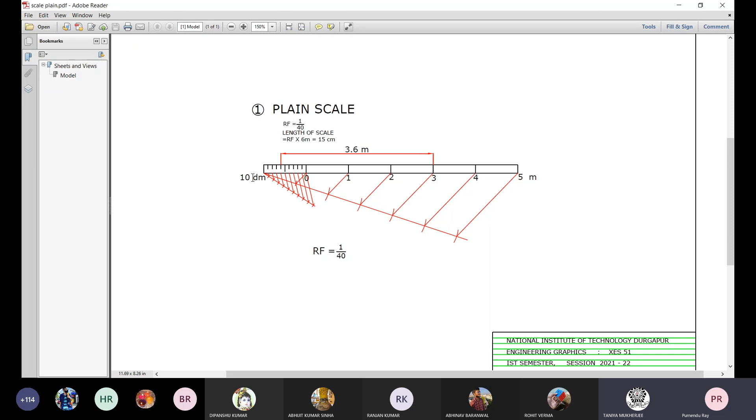Next step, this 15 centimeter length which represents 6 meters is subdivided in 6 equal parts, so each small division represents 1 meter according to our RF, the representative fraction. Next, 1 meter is to be subdivided into 10 equal parts. So this is the geometrical way.

Along any inclination, take any suitable radius, go on marking with these arcs of that fixed radius for 10 divisions. Now connect this point with that point and draw a series of lines parallel to this connected line: 1, 2, 3, 4, 5, 6, 7, 8, 9. So this line is subdivided into 10 equal parts geometrically.

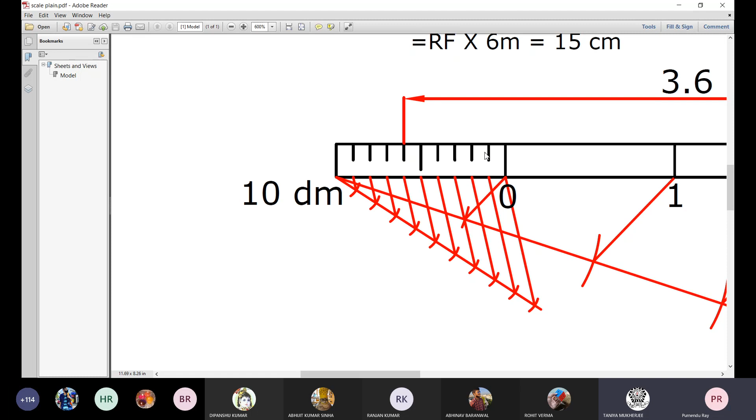Now place two set squares, one along this line, the other perpendicular to that. When you match it, connect this point with that set square and draw a line here. But for this 15 centimeter line as length, we draw a rectangle, so this perpendicular line and this parallel line at a gap of around 5 millimeters.

So we draw this rectangle, then mark these subdivision points with 0 major subdivision, 1, 2, 3, 4, 5. Write the unit as meter. Now for this part, as if it is looking like a real scale...

We draw a bigger line starting from the upper side of the rectangle and, using two set squares, one edge of one set square matching with this line, the other set square made perpendicular to that set square edge, draw these small lines. Is there any doubt about this?

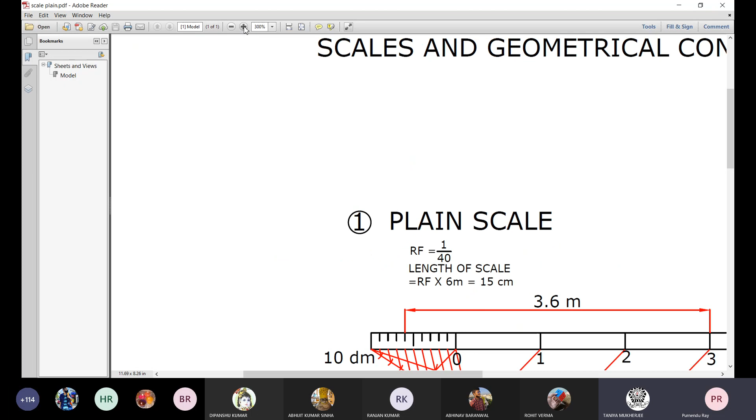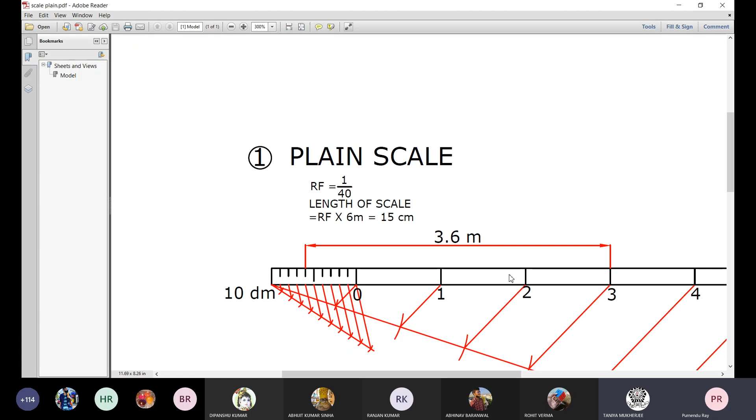Now once you complete this part, the scale is ready to measure any length, of course within 6 meters.

Now according to the question, you have to show a distance of 3.6 meters. So from the 3rd division, draw one extension line, from the 6th division of 1 meter, that is 1, 2, 3, 4, 5, 6 decimeter, that is 0.6 meter. Draw one extension line, draw this dimension line, put the dimension arrowheads, put the dimension figure and the dimension unit 3.6 meter according to the scale with this RF, and put the value of RF equal to 1 divided by 40.

Write it below this drawn scale. Now one more thing, these lines with this red ink, it will not be - of course it may be available, but you should not do it. It is only to differentiate between this process of geometrical division and the scale. I have taken it, but in your drawing you have to show all this construction with very thin lines, with lighter impression. But they should be there to give your examiner the information that you have subdivided this line geometrically in 6 equal parts, you have subdivided this one division in 10 equal parts, etc.

I hope I am not muted. Yes sir, no sir, okay. You are audible sir, audible sir.

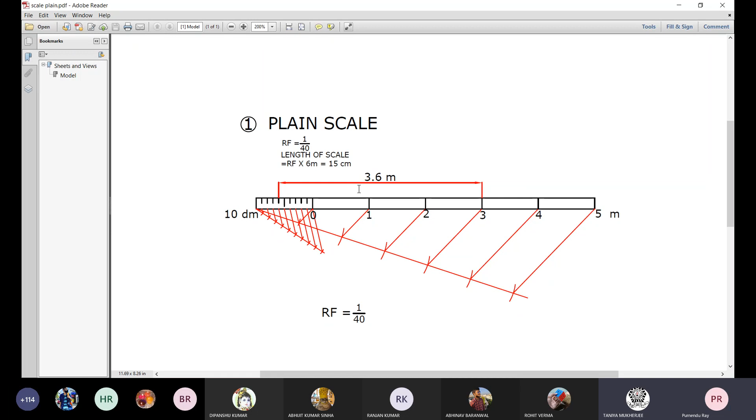And finally, you have to show this distance 3.6 meters there. That corresponds to the one solution on plain scale, and you need to accommodate only this problem on one A4 sheet in landscape mode, because it is not like your NIT drawing hall practice with big size drawing sheets to accommodate many solutions. It is not there. So at your home, whatever is available, you work accordingly. I hope before our next class you will be completing this.

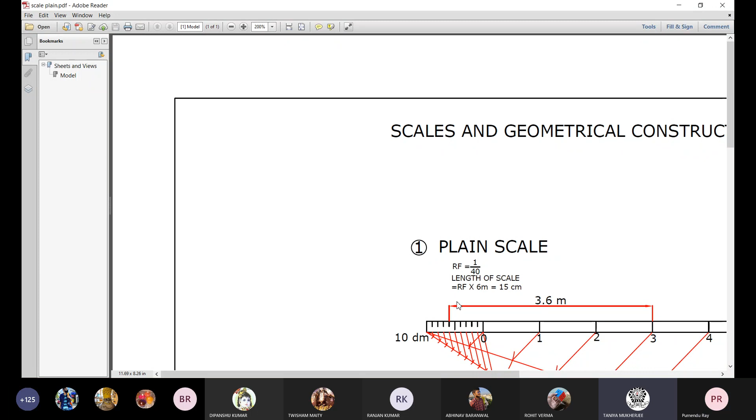But let us provide 5 millimeter gap there for this rectangle. And on the upper line for this rectangle, we draw these smaller demarcation lines. But this halfway, that 5 decimeter line, should be little longer, but not touching this bottom line, so that it looks like this representative scale. Now that is for plain scale.

Now we discuss about - sir, I have made one, can I show? You have made one? I have made one yesterday - before class you said how to make it, so I tried to make it. Can I show you if it's right or wrong? Just can you give me a little time so I finish this demonstration first? Okay sir, no problem, no problem.

Okay sir, now this plain scale - almost complete information is there. Next thing, let us talk about that vernier, the diagonal scale, whatever we have discussed that day. Now I will share that file.

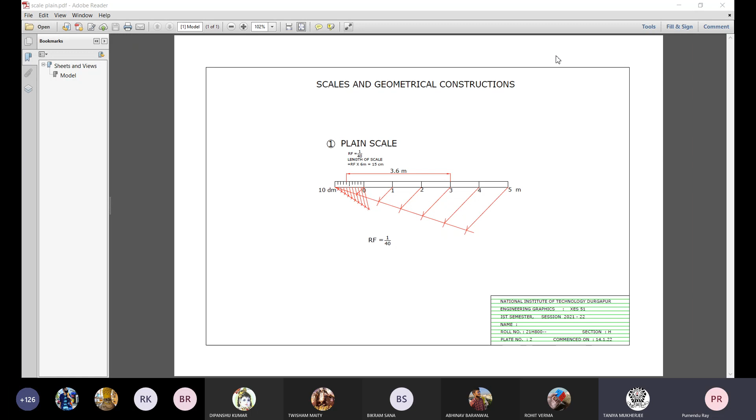Is it available there? Yes, sir. So take a separate A4 page, draw the borderline at the right hand bottom corner. You draw that title block with ink. You write your roll number, corresponding section, date of commencement, etc.

Sir, one question. In the big size paper, you said the title block size will be 180 by 65 millimeter. But you said we have to do it in A4 size paper. So what will be the size in that smaller paper?

In the smaller paper, the font size is 5 millimeter, which is prominent. But according to the paper size, if you want to reduce it according to that scale, the mathematical calculation comes to 2 millimeter. So if you write something with 2 millimeter height, it will not be readable.

So that's why you can take some space. I think the height is 65 millimeter, not 80. So if you use 65 millimeter plus 10 millimeter plus 10 millimeter, that is 85, 65 plus 20, 85 millimeter out of 210. Then whatever space is left, you can accommodate this drawing there.

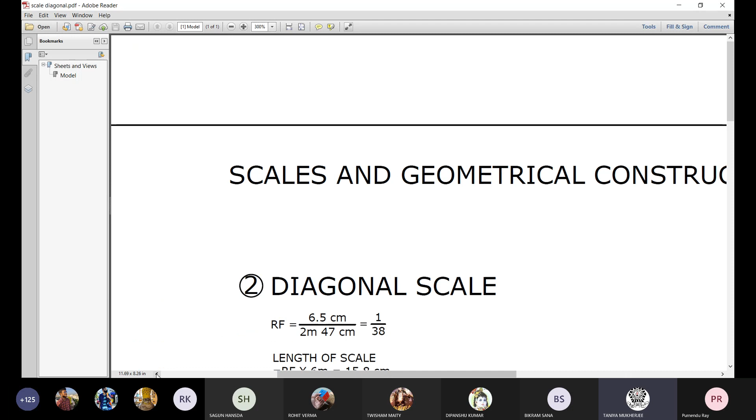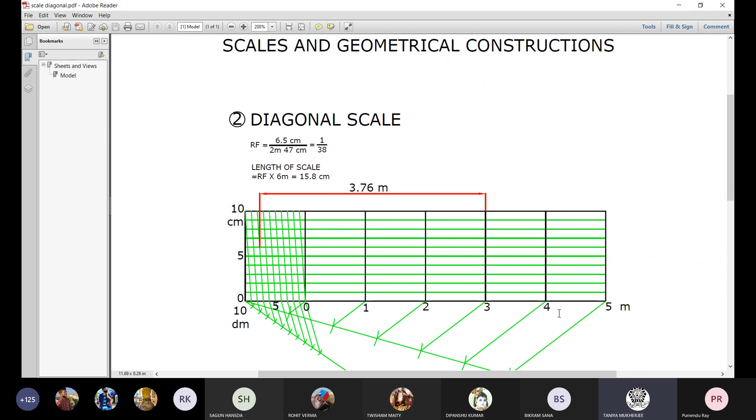Is it okay now? Yes, sir. Now, first step was to calculate the length required, the real 1:1 length. RF you have to calculate, it is not supplied.

This is the drawing distance, 6.5 centimeter. This is the object distance, 2 meter 47 centimeter. So the ratio is normally written in the form 1 divided by some number, that is the reducing scale, RF. Now the length of scale is RF multiplied by the length to be shown there. So 6 meter multiplied by RF is 15.8 centimeter.

This is not a very handy value of 15 centimeter to subdivide in 6 divisions. It's not like that, it is 15.8 centimeter. So take a length of 15 centimeter 8 millimeter along this horizontal line.

Then subdivide the upper green line into 6 equal parts, you know how to do that. Then you get 1 meter, subdivide it into 10 equal parts. Next step, draw this black rectangle of 40 millimeter height. That is in our hand.

So the height of the rectangle may be from 1 inch to 1.5 inches, something like 25 millimeter to 40 millimeter. But let us take for our convenience 40 millimeter, so that we can set a distance of 4 millimeter in our spring loaded divider. Now take a length of 4 millimeter, fix it and go on marking 4 millimeter, 4 millimeter, 4 millimeter in that way. And repeat that on this side also.

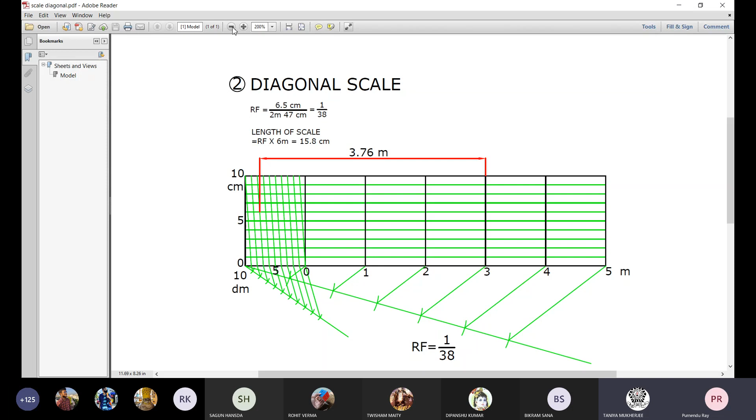Sir, it is right, it is right. The second one, yes sir. So follow this instruction, this information. This is the calculation, this is the corresponding length required, 15.8, and these are the steps. I hope this has been demonstrated and elaborated quite extensively. There should not be any problem with anybody.

Okay, but you have to take several pages, one solution in one page, and you please use your leisure hour.

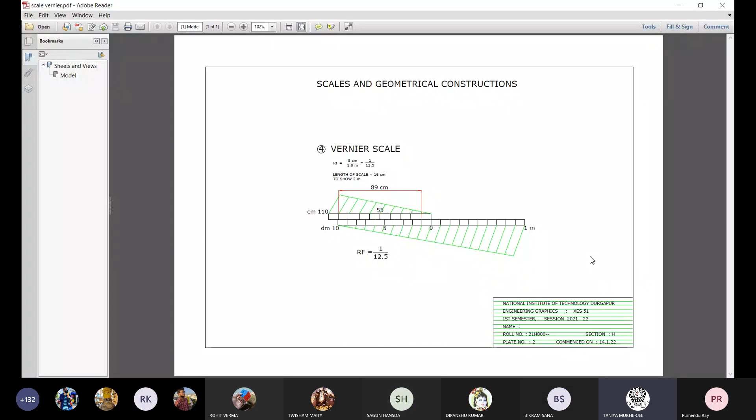Third one is skipped. Pardon? You skip the third one. Is it not the problem number 4, the vernier scale? Yes sir, but you skip one - third one is skipped, that I am telling.

Look, in a book there might be 950 problems, and in your school your teachers took only 15-20 sample demonstrations. Okay, so no problem.

I was thinking you will take all the sums. No - some sample demonstration will be there, then you have to put your own investment. That your investment capital will be your time, your intelligence, your passion for learning the subject from other materials. Compare different solutions, go through many books, hard copy, soft copy, but you have to give your time, and there is no such shortcut in learning.

The learning procedure is fixed, whether it is at your home learning from your mother's nursery rhymes, or whether at school, university, colleges, whatever it may be. Primary investment should come from your side, otherwise this business in no way can you make profitable. Okay.

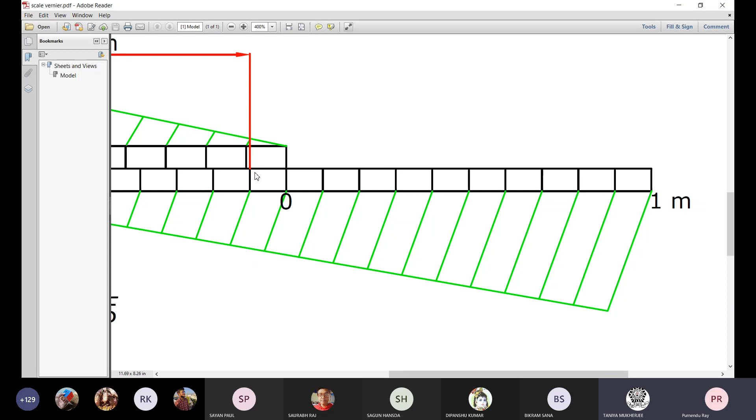Now, once you have that 1 centimeter reading, you cannot get that 1 centimeter subdivision for each such thing. For the second subdivision, the gap is 22 centimeter minus 20 centimeter, that is 2 centimeter. Here the gap is 3 centimeter, but ultimately this is 33 centimeter on the upper line, 30 centimeter in the lower line. So you have to match the calculation corresponding to the length to be measured.

Now centimeters are in the multiple of 11 only. So if you find this required length to be shown is 89 centimeter, you first check the place of this unit. This is 9. So take a distance of 9 such divisions on this centimeter scale. It will be 99 from 0.

And from that you need to subtract 10 centimeter which is available in the main scale. So put a line here as an extension line which gives 99 centimeter from this 0, and put a line 10 centimeter from this 0 on the main scale. Then what about the distance between these two extension lines? It is 99 up to 0 minus 10 up to 0, that is 99 minus 10, that is 89.

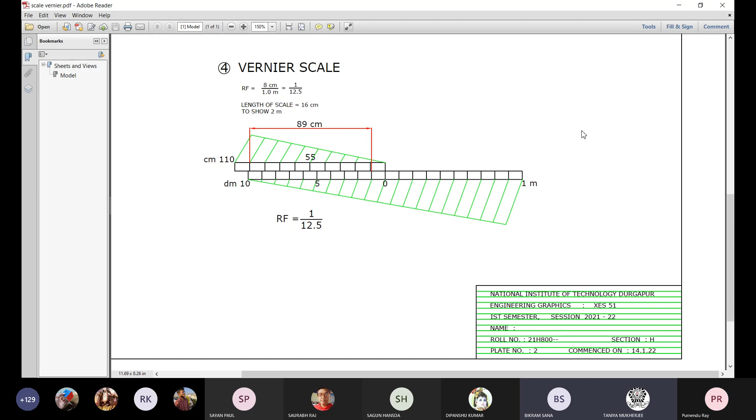Sir, how will marks be given for engineering drawing? Engineering drawing, total 100 marks is there.

There is no CA1, mid-sem, end-sem formal examination, but your performance will be evaluated. First type of thing is the on-the-spot test. After this discussion, I will give you some different data, maybe some 9 centimeter length representing a certain length,

and you calculate the RF, then find the length of scale and draw a vernier scale. The data will not match with this sample. I will give you half an hour time during this 2 to 2:45, half an hour time. You start, take half an hour, finish it.

Then I start the meeting again. At random, I will ask you to put your camera on and focus it on your solution page, and immediately I can get that impression about your performance.

That is the running class performance, which we normally do during the real classroom in your engineering graphics sessional class in the drawing halls at NIT Durgapur. There, so many people are there, maybe 3-4 teachers, along with 2-3 PhD students, research scholars, and 3-4 master's degree students doing MTech at NIT.

So there will be so many people. First of all, they are your service providers. At the same time, they are your examiners also. So they will roam around the classroom and go to every table and note down your performance within that stipulated time.

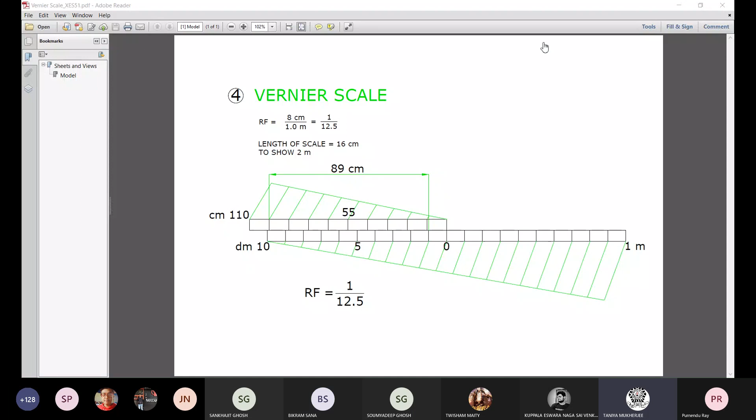So from that diagonal scale, just 1 minute. This is for meter, decimeter, centimeter. Suppose the length is there in yard, suppose 5 yards or 6 yards. So subdivide in 6 equal parts, and one part will give you 1 yard. Now you subdivide this 1 yard in 3 equal parts. Then the small division is 1 foot. Then diagonally, instead of 10 such boxes, you make 12 such boxes.

So you are subdividing this 1 foot in 12 equal parts diagonally. Then the small division you are getting diagonally is 1 inch. So you can take up that type of problem. Whatever book you are following, take that type of problem for your own practice. And for assignment, there will be a combination, maybe.

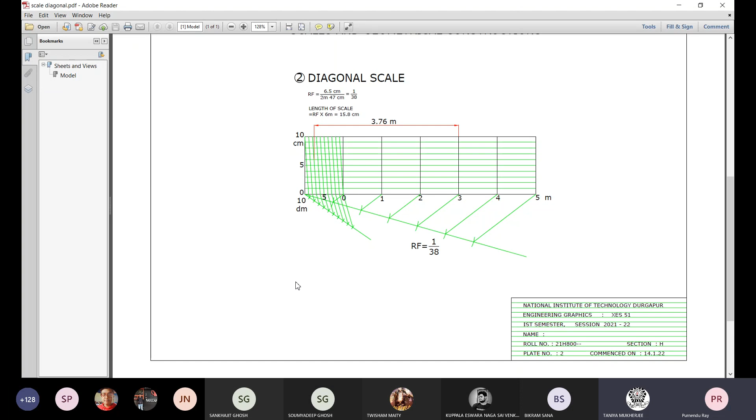Now, after this scale portion, there are several problems on geometrical constructions. These geometrical constructions start from problem number 6, and regarding this problem number 6, I discussed earlier.

Now, is that file shared? The problem sheet? Not available on your screen. No, sir, in the screen it's not shared, you have shared in mail. Got it. Anyway, now it's shared.

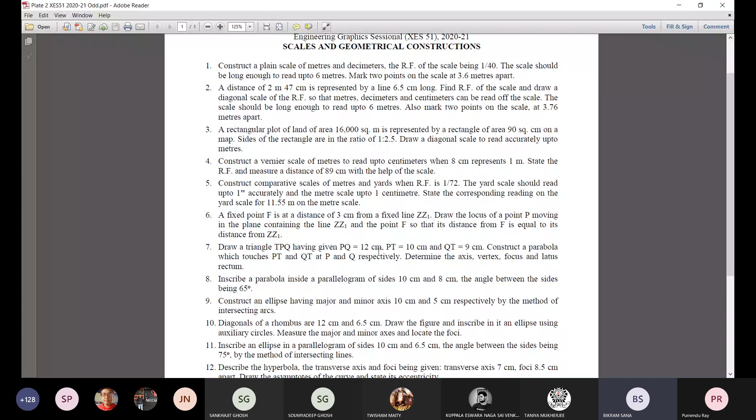Now, this problem 6 was discussed. Problem 7: Draw a triangle TPQ having PQ equal to 12 centimeter, PT 10 centimeter, and QT 9 centimeter. Construct a parabola which touches PT and QT at P and Q respectively. Then determine the axis, vertex, focus, and latus rectum. Now I will go for that approximate method of drawing a parabola by this triangle method or something like that.

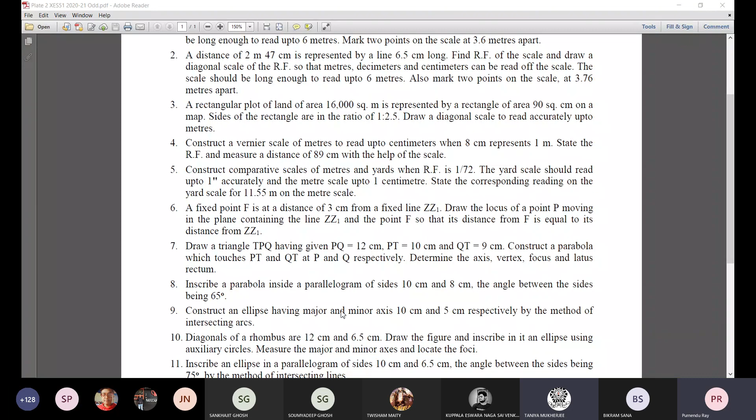It may be directrix and focus - these two informations are given. That is the conventional problem, the first problem on parabola. Now, just hold a minute.

Now, is it there? Yes, sir. First step, you draw this triangle with the given information. Now, all dimensions in millimeter - it is written somewhere on the top of the title block, so we do not mention the units separately here, 120 millimeter, 100 millimeter, etc.

So draw this line PQ horizontal of length 120 millimeter. And how to draw this triangle with PT 100 and QT 90 millimeters, that you know very well from your schools - simply draw two circular arcs of radius 100 and radius 90, taking point P and Q as centers. So this point of intersection, you do it.

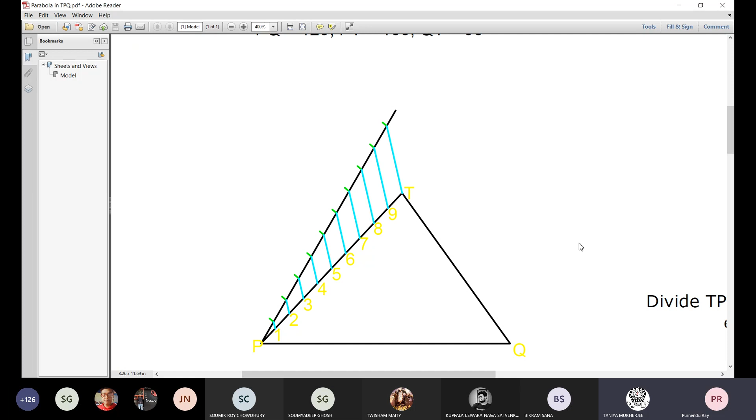Divide TQ geometrically in 10 equal parts. The same thing - take any line along any inclination, take any suitable radial distance, go on marking them in that way. If it is P, it is T, and now it is Q.

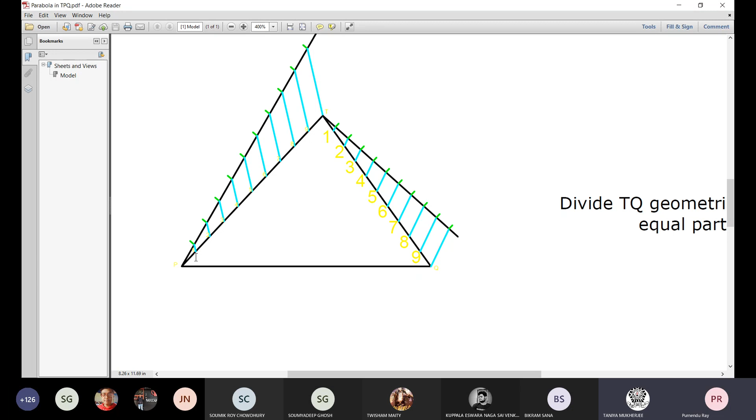So now one thing - you start marking with these identification numbers 1, 2, 3, etc., not from bottom, but from top. In the earlier case, it was from here 1, 2, 3, 4, 5, 6, etc. Now it is coming down 1, 2, 3, 4, 5, 6, etc. Next step.

Draw the lines connecting one with one on this line PT to other on the line TQ. This process we have done with this colored line. What about the name of this color?

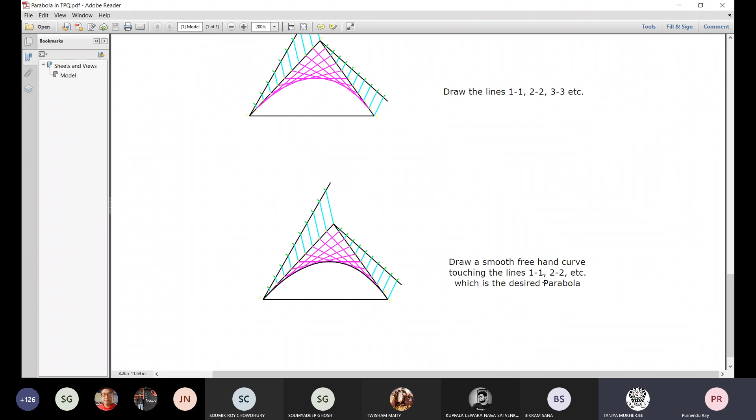Now next step is to draw a smooth freehand curve touching the lines 1-1, 2-2, etc., which is the desired parabola.

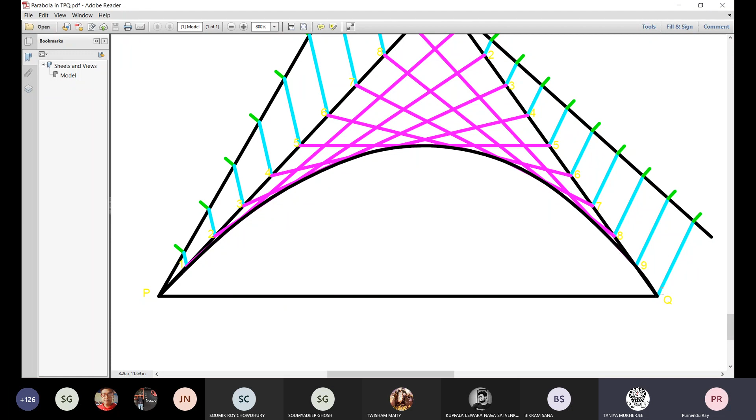So take the pencil and with very lighter impression, you just go on touching the straight lines in this way very smoothly, and you should not make it at one go. With very thin, very lighter impression, you try to make this line, then erase it, make it a little more close to a curve, a continuous smooth curve. In that way, after 1 or 2 trials, you can draw this line. Now make it prominent.

Now there is another part of this question. What about that? Latus rectum. Determine axis, vertex, focus, and latus rectum. You take 5 minutes time to think.

I'll join. I'll take the attendance and I'll join. No, sir, we know.

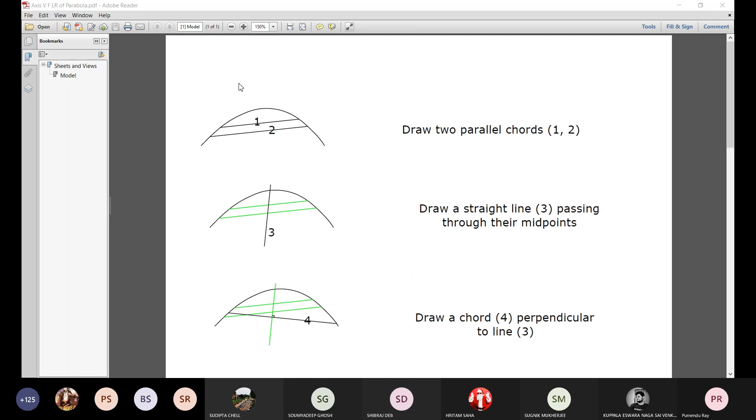Is it available on yours? Yes, sir, this thing is done in that problem. It will bisect. A triangle TPQ was there, touching these 2 straight lines at this location and this location, P and Q. This is done.

First step, draw 2 parallel chords, 1 and 2. Next, draw a straight line, line 3, passing through their midpoints. This is one chord, this is another chord. Get the midpoint of these 2 parallel chords, join this line and extend it.

Now, what about the property or nature of this line passing through the midpoints of the parallel chords? What is the property of this black line 3? So it is a double ordinate.

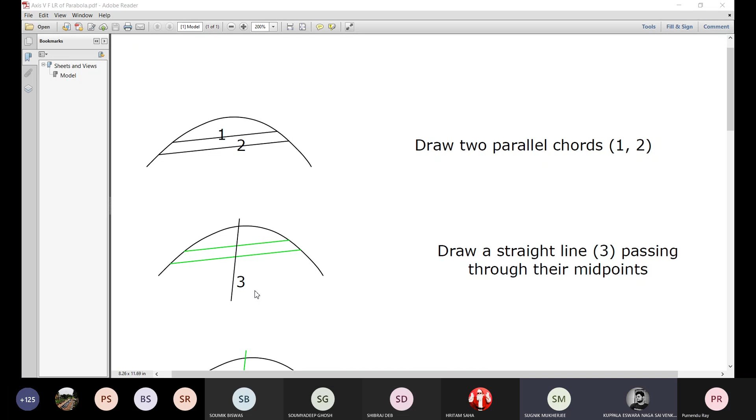It will be parallel to the axis. Yes, sir, so it is the double ordinate of the parabola. This line is parallel to the axis.

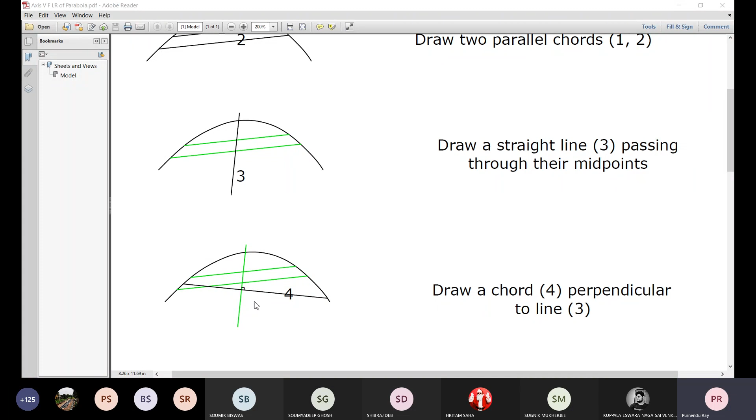So this is that line which is parallel to the axis, but not the axis. But one thing is sure: if we draw a line perpendicular to this, it will be a chord which is perpendicular to the axis.

So draw a chord 4 perpendicular to line 3. This is not the axis, meaning the sides are not symmetric. Had it been the axis, then this length and this length would be identical.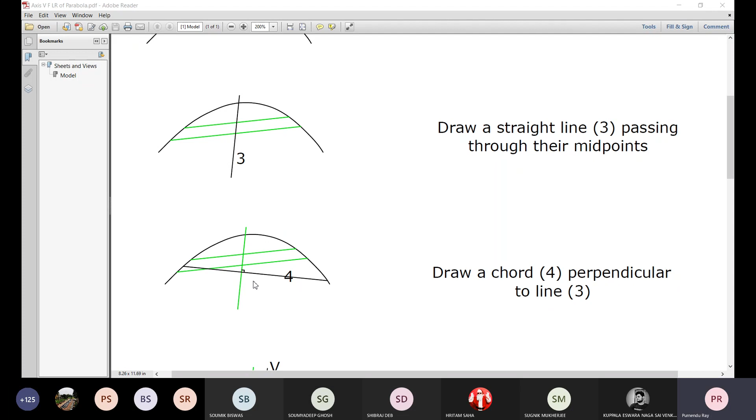But this line is other than the axis, but it is parallel to the axis. So if we draw a perpendicular chord, then this chord will be perpendicular to the axis also. Now, if this line is perpendicular to the axis, naturally its midpoint will be at a location that the axis passes through.

So this is this step: draw a straight line 5 passing through the midpoint of chord 4. This was chord 4; through its midpoint, draw a line perpendicular to this, or parallel to that line, whatever you have received earlier. So draw a straight line 5 passing through the midpoint of chord 4 and parallel to line 3.

Line 5 is the axis of the parabola, and V is the vertex. So once the axis and vertex are determined, the rest is easy - how to get the focus.

Now, if here is the focus, then what about this distance and what about this distance? If it is the focus, of course it is not - we need to find it. But if this is the focus, then what about this distance and this distance?

So they will be equal. If it is the focus, then the distance from that equation, y squared equals 4ax. This length is a, and this length is the latus rectum, 4a. This is twice a, this is twice a. So this length is to this length as 1:2 if it is the focus, but it is not the focus.

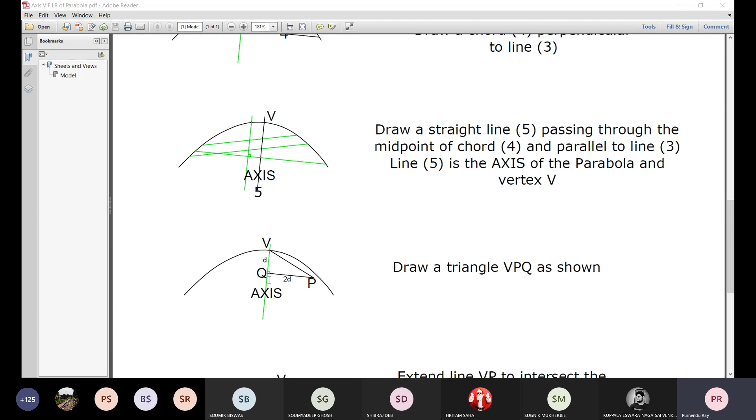So to find that, we do this: at any distance d along this axis, take a length d. This location is q, and through q draw a perpendicular.

So at a distance, identify location q. From q draw a perpendicular of length twice d. Had it been the focus, then the ratio would be a is to twice a, and this point would have been there on the curve, the locus, but it is not like that.

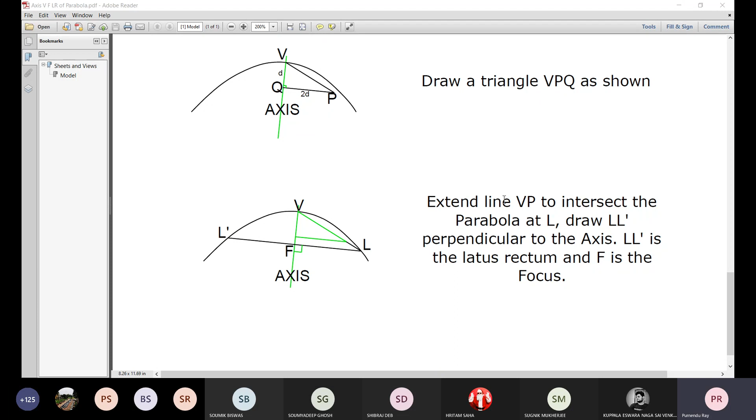So what we do is extend this line VP to meet the parabola - extend line VP to intersect the parabola at L. Now LL prime perpendicular to the axis - LL prime is the latus rectum and F is the focus, because F satisfies that geometrical criteria that VF is to FL as 1:2, since it is satisfied from this similar triangle, D is to twice D.

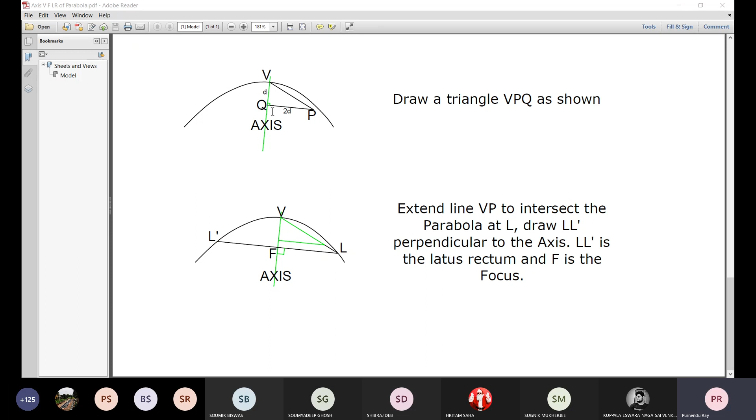So this is the whole thing. Take a screenshot.

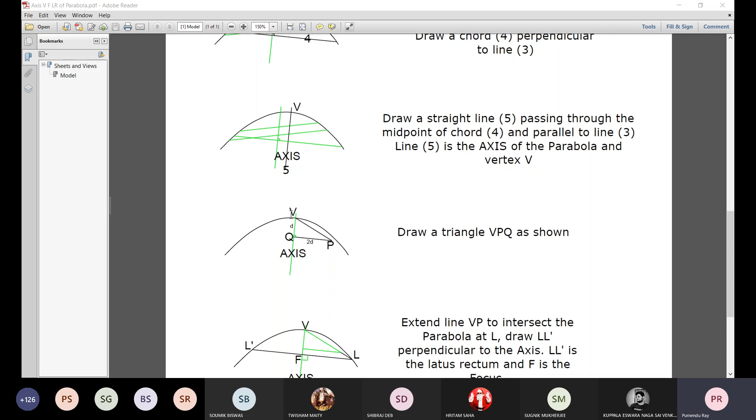It depends, and you will gather experience while you work with all these things with your own hand, your instruments, etc. Then the vertex is there, the focus is here, this is the latus rectum.

Then what about the directrix? Extend this axis in this way, measure this distance A equal to VF on this side, identify it, and draw a line perpendicular to that extended axis line.

So it takes a lot of time to demonstrate in detail about each and every problem, but we cannot afford that much time. So for that, you now have this primary instruction about all these things. Please consult a book - purchase a hard copy, a soft copy, or get a second-hand book.

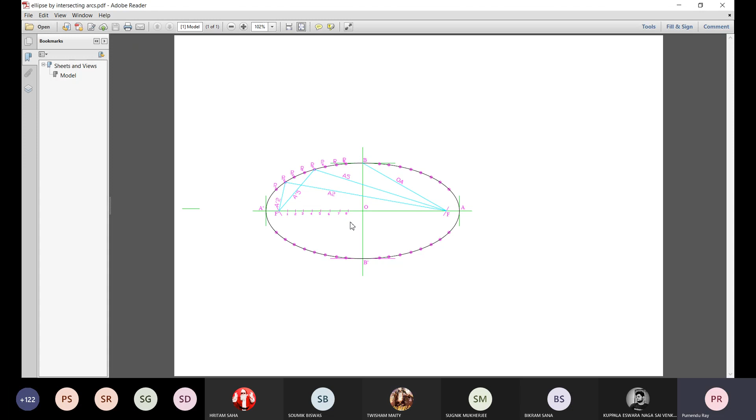Now, am I audible? Yes sir. Do you find a new screen there? A new page? Yes sir. An ellipse.

The information given is this major axis length between A and A prime, and minor axis length, this distance between B and B prime. So draw the ellipse. Of course, it is biaxially symmetric and a closed curve.

So this is one mirror line. For this part, it will be the mirror image. About this line, this part is the mirror image of this one. So if we can draw any one quadrant, any one quarter of this locus, naturally we can repeat by XY plotting etc. on the other side also to get this one, and about this line on the other side, that is the lower part also.

Now the steps are: take a horizontal line, mark two locations A and A prime with the major axis distance given. Next, through its midpoint, draw a vertical line, and half of the minor axis on the upper side and half of the minor axis on the lower side, those distances you identify on these two sides. So you are now ready with these points, capital A, A prime, capital B and capital B prime.

Next step, take B as center of a circle and take a radius as OA, the semi-major axis length as radius, and about this point B, you draw one circular arc to intersect this horizontal line at point F. Obviously, from that geometrical clue, it will be the focus F, and the mirror image point you can find out simply by measuring this distance with a divider or compass and mark it there, or you can use the same distance OA as radius, take this point B as center, and with that radius draw one circular arc to get this point of intersection.

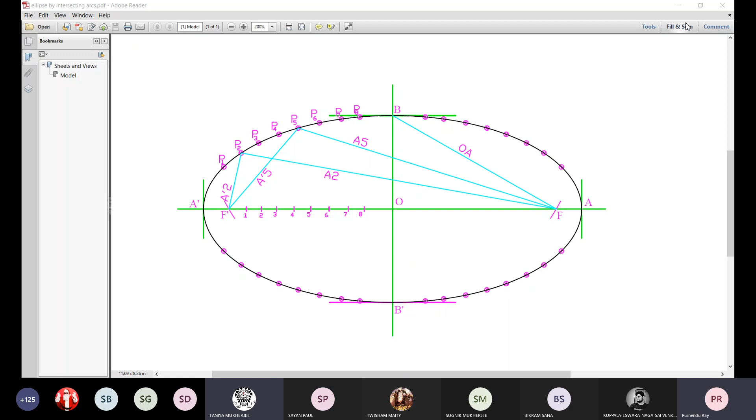Sir? Yes. So how do I take the focus? Can you repeat please? Just hold, let me unshare this file and come back. You just wait for a minute, I'll make it ready and then I'll tell you.

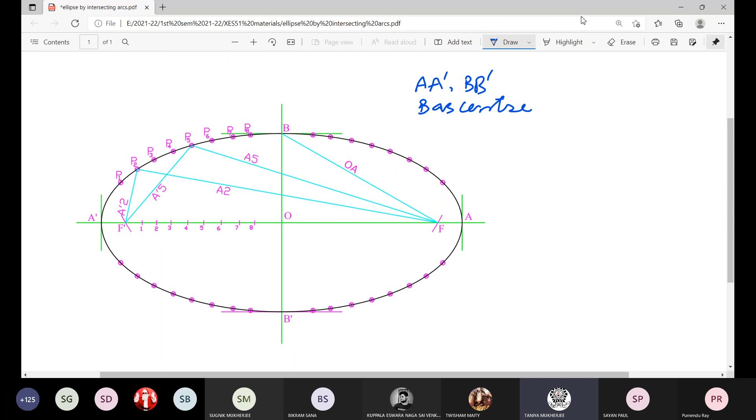Right, then B as center, radius equal to OA. Draw the arc. Intersect the line AA prime at F and F prime.

Is it okay now? Yes sir, so which are the focus? Then 1, 2, 3, 4, etc. are arbitrary.

Sir, these numbers do not have to be same length placed? Arbitrary means no common gap, no constant gap. Arbitrary means arbitrary. Okay, but sir, one thing, when you take the distances, they must be consistent. That is, one is distance between A prime and 2, other is distance between A and 2. This distance is here and this distance is here.

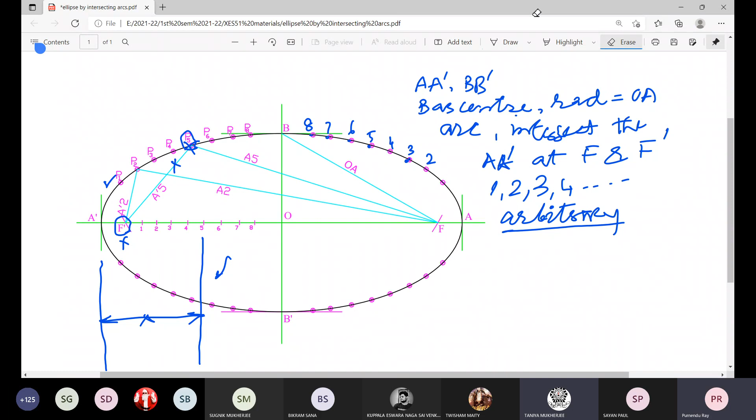No sir, but one thing - determination of these points is one part. The next important part is to draw a very smooth, continuous freehand curve passing through all these points in this way.

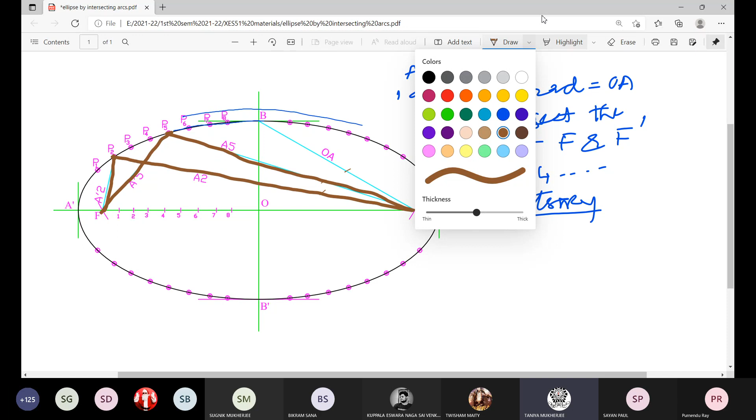So we will be happy with this construction line and this object line? No sir, suppose this is the construction line, this is the construction line, and the final object line is like this.

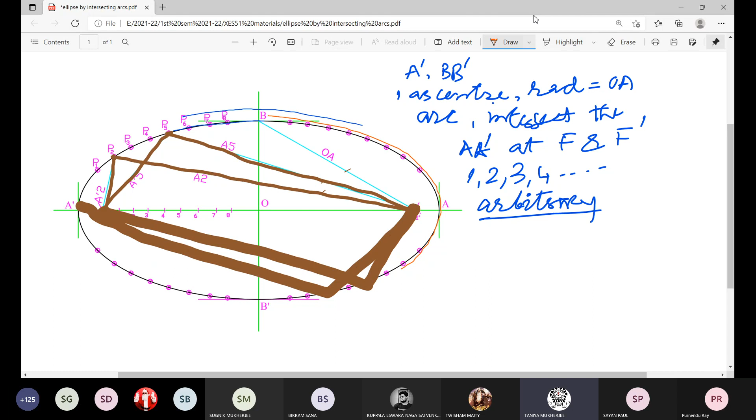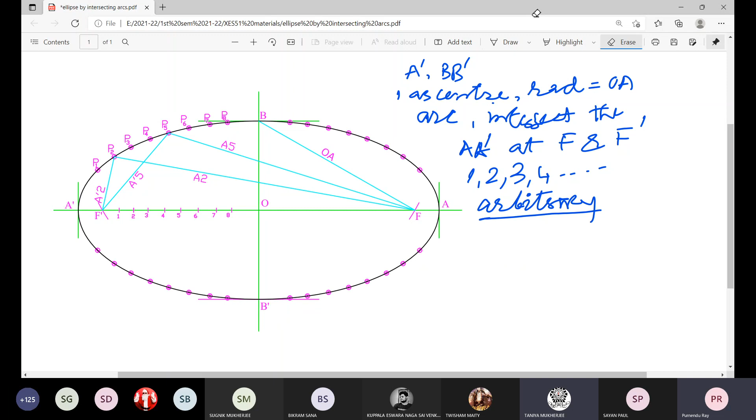Any more questions about this? There are so many other methods - please consult the book, because a single class can demonstrate hardly 3-4 such cases.

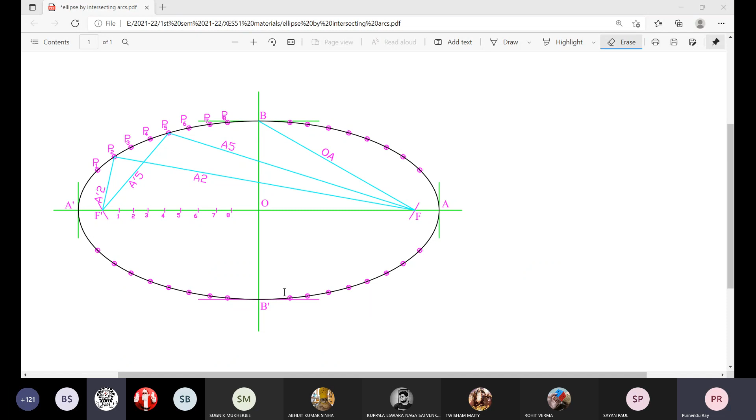But we have remaining major chapters also there. So please go through these geometrical constructions from any book and try to solve them. I will assign some as your assignment, and you do it at home and send it through mail or some other means.

Can I show the plane scale? Show the plane scale. I said at the beginning that...